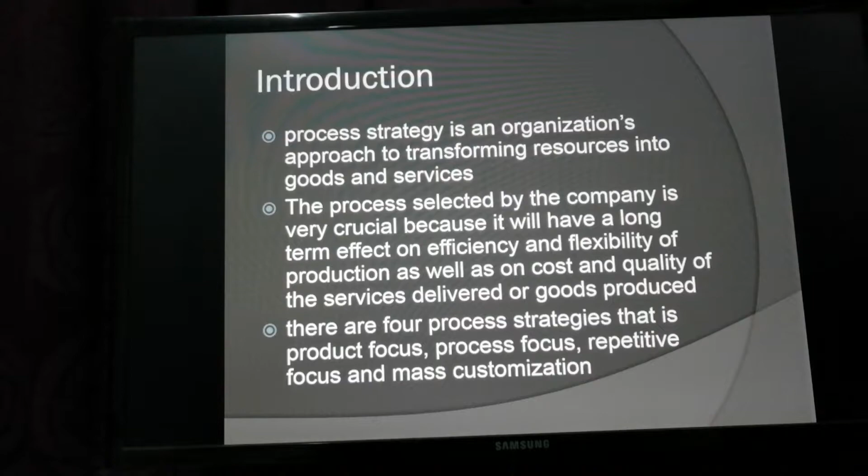Company background of Top Glove. Top Glove Corporation Berhad is the world's largest manufacturer of gloves, established in 1991 and headquartered in Malaysia. It has over 2,000 customers in 195 countries worldwide. Top Glove's main products are rubber gloves, synthetic gloves, and surgical gloves. Top Glove products are an essential item in the healthcare industry, ensuring human safety and helping to save lives.

Okay, why we choose Top Glove? Top Glove Malaysia, 19 November 2020, is selected for this case study because it met the criteria of product focus, which produce high volume and low variety, continuous flow process, long runs of product type such as size, grade, and color, require high fixed cost but low variable cost, reward high facility utilization.

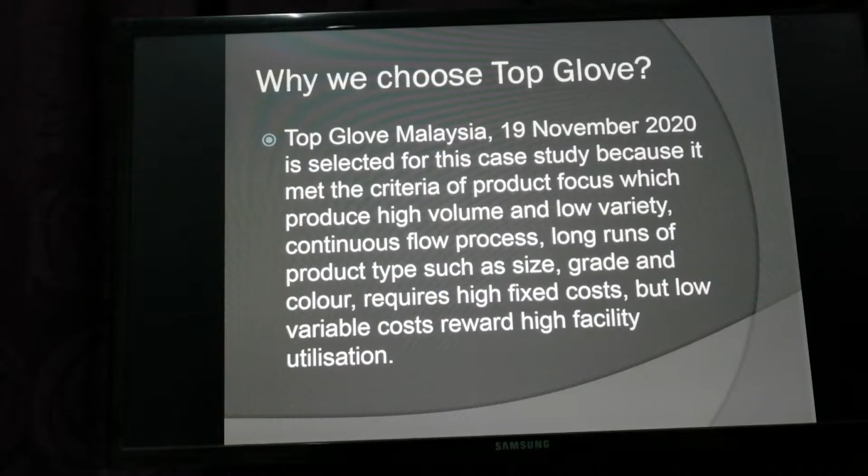Literature review of Top Glove. We study about Top Glove Malaysia from 21st September till 27 September 2020. Top Glove Corporation Berhad released its best ever quarterly results last week with a net profit of more than 1 billion, meeting consensus expectation. The stellar growth stemmed from the global surge in demand for gloves as a result of the COVID-19 pandemic. With the increasing awareness of personal hygiene, they are confident that demand will continue to increase.

With COVID-19, Top Glove estimate that glove demand will grow by 20% per annum in 2020, 25% in 2021, and 15% post-COVID-19. Due to their investment in automation and continuous R&D, they have improved productivity by 78% from 8.4 workers per million pieces of glove to only 1.8 workers per million currently. The group has earmarked RM8 billion for capex over the next 6 years from 2021 to 2026, which will provide them with an additional capacity of 100 billion pieces of glove.

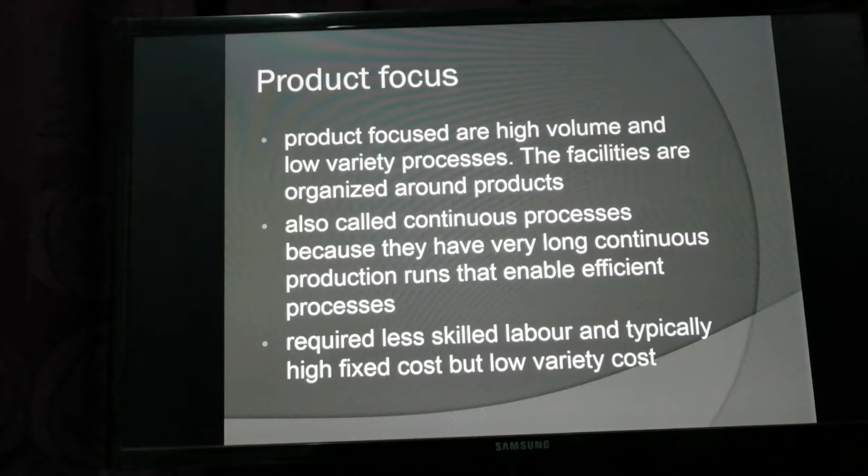Okay, we will look at the product focus process. Product focus are high volume and low variety processes. The facilities are organized around products. It is also called continuous processes because they have very long continuous production runs that enable efficient processes. It only requires less skilled labor and typically high fixed cost but low variable cost.

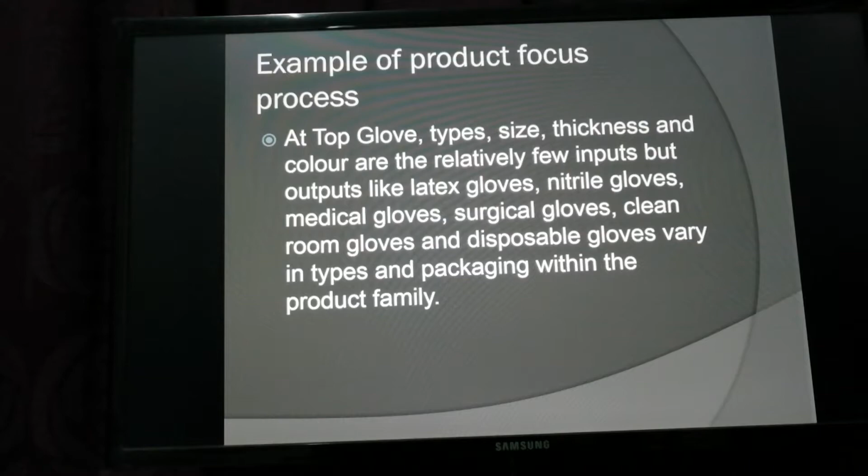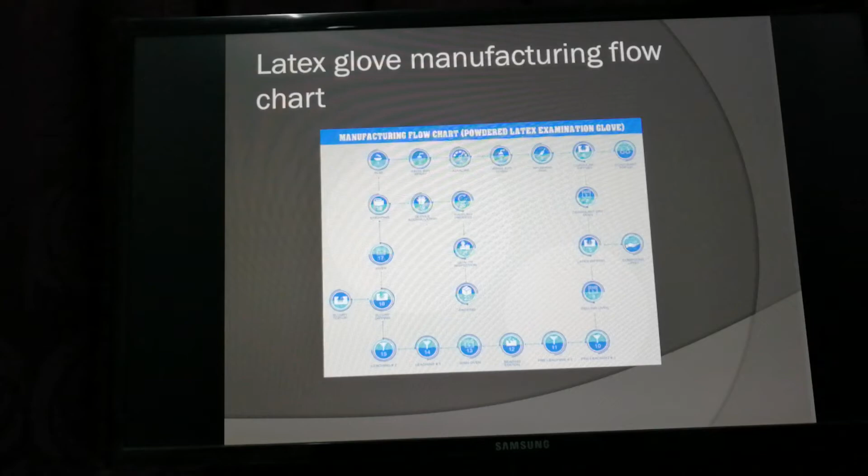Example of product focus process. At Top Glove, type, size, thickness, and color are the relatively few inputs, but outputs like latex glove, nitrile glove, medical glove, surgical glove, clean room glove, and disposable glove vary in types and packaging within the product family. Types of glove. And then we will go to the latex glove manufacturing flow chart. We will look in detail at the following content.

The first process is former cleaning. The glove former needs to be cleaned before it can be used to form hand-shaped latex glove, before the latex can be processed to the coagulant dipping process. Glove formers must be dipped into an acid bath and then rinsed with clean water. An alkaline bath is used by dipping the glove formers in it to neutralize the acid, and again rinsed in clean water. Okay, after that, glove formers are brushed to ensure the surface of the glove former is consistent and eliminate pinholes on the latex glove after it is formed.

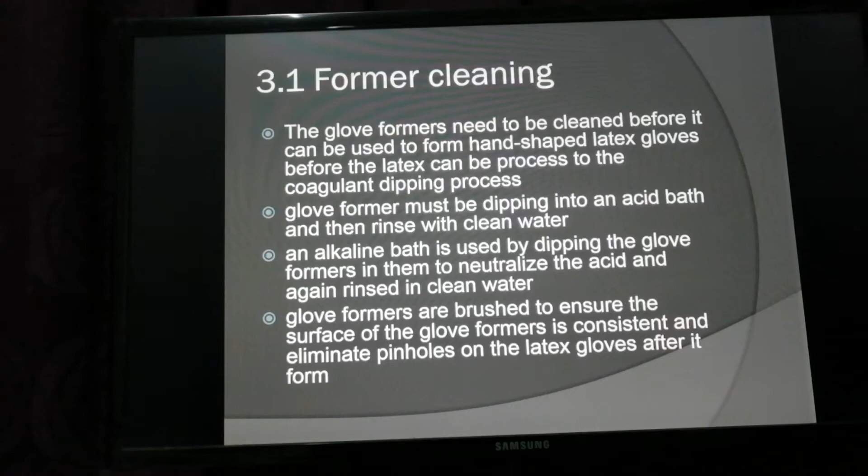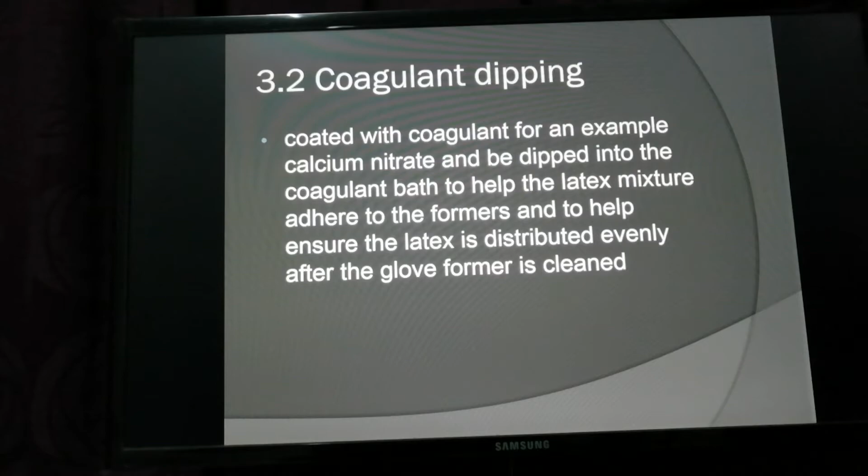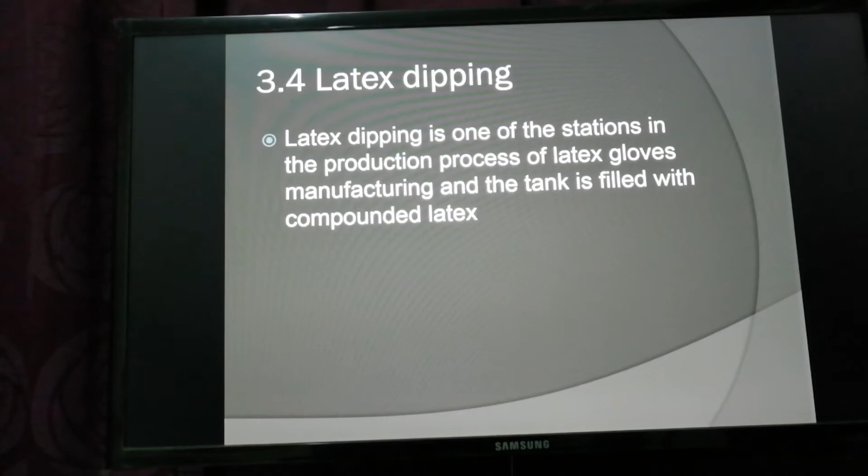Next process, coagulant dipping. Coated with coagulant, for example calcium nitrate, and dipped into the coagulant bath to help the latex mixture adhere to the formers and to help ensure the latex is distributed evenly after the glove former is cleaned. And then drying. It is a process of drying the glove from wet to ready-made gloves. After that, latex dipping. Latex dipping is one of the stations in the production process of latex glove manufacturing, and the tank is filled with compounded latex.

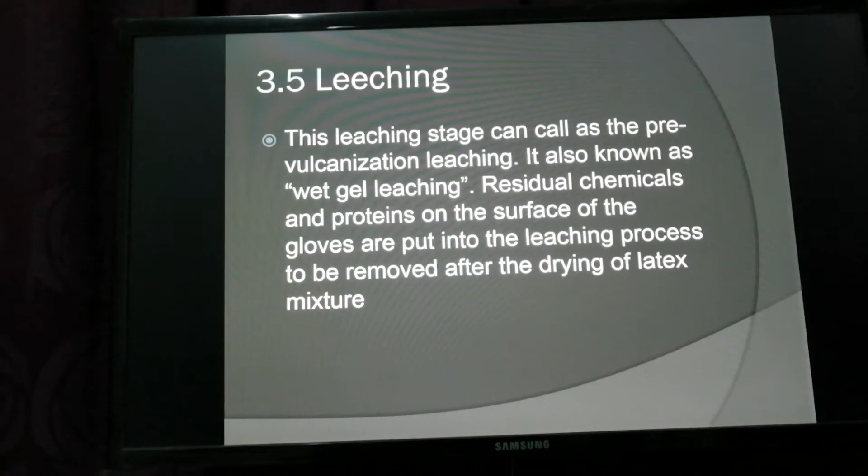Next process, leaching. This stage can be called the pre-vulcanization leaching. It is also known as wet gel leaching. Residual chemicals and proteins on the surface of the gloves are put into the leaching process to be removed after the drying of latex mixture. In the beading process, while still in the wet gel state, the cuffs of the newly formed gloves are rolled back by rotating beading brush to form beads. Beaded cuff also gives strength to the gloves as well as enhancing the ease of donning the gloves by user later.

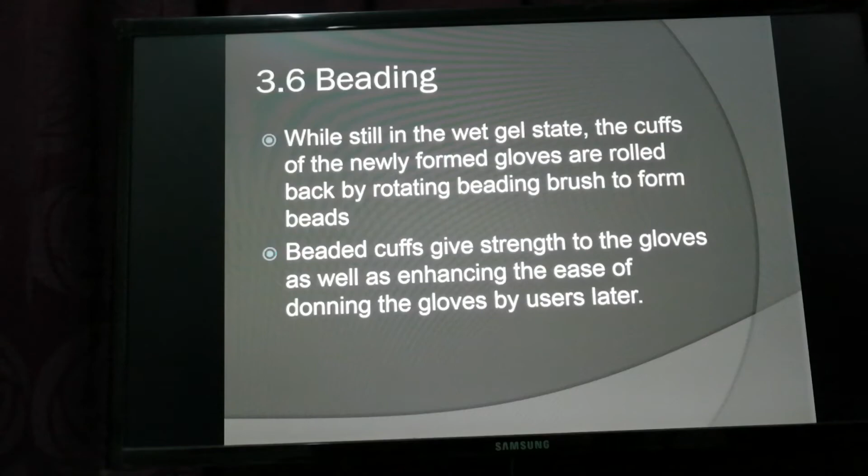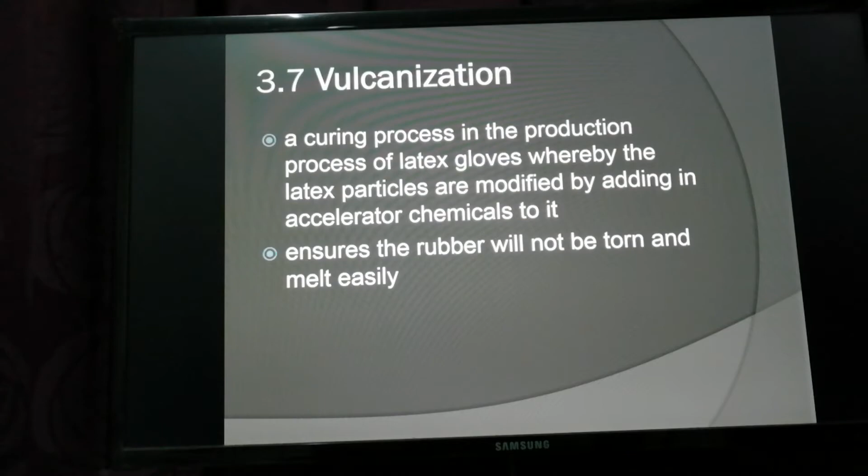And then vulcanization, a curing process in the production process of latex glove, whereby the latex particles are modified by adding in accelerator chemicals to it. It also ensures the rubber will not be torn and melt easily. And then post-leaching. This process is similar to the wet film leaching previously. Time and temperature is the most important element to ensure effectiveness in the process of water extractives reduction.

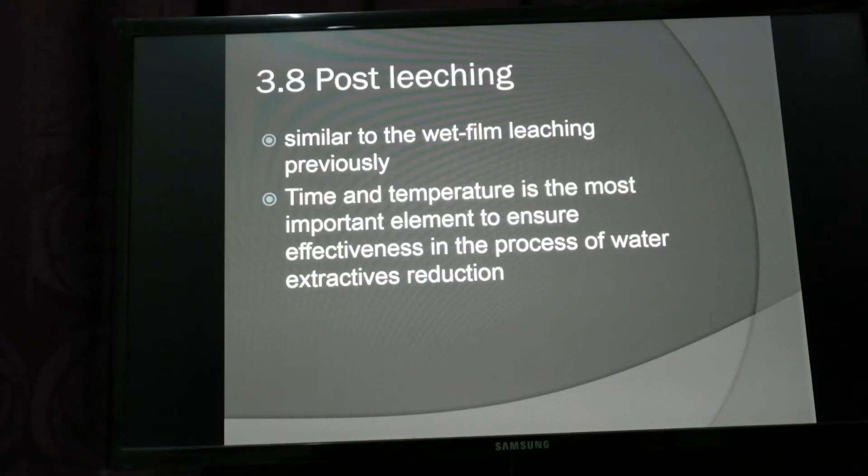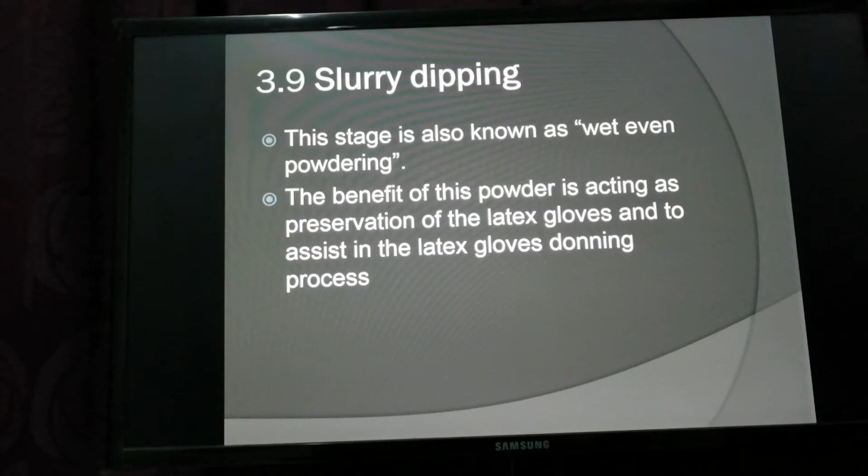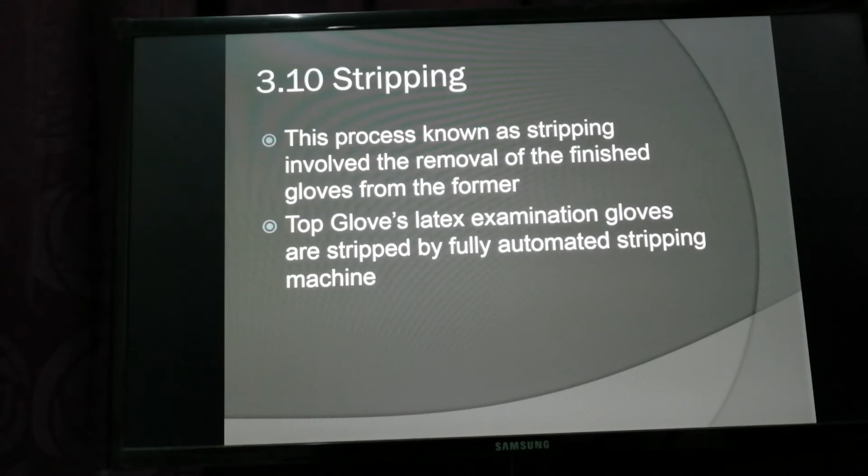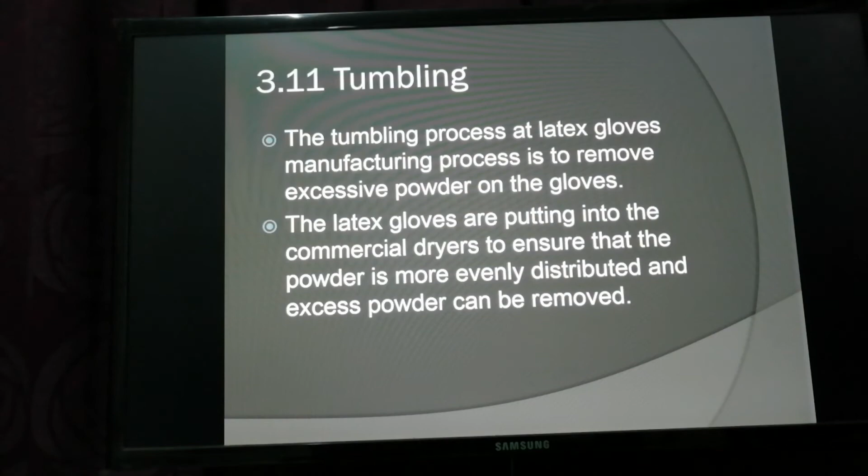And then slurry dipping. It is also known as wet powdering. The benefit of this powder is acting as preservation of the latex glove and to assist in the latex glove donning process. After that, stripping. This process involves the removal of the finished glove from the former. Top Glove latex examination gloves are stripped by fully automated stripping machine. After that, tumbling. This process in latex glove manufacturing is to remove excessive powder on the gloves. The latex gloves are put into commercial dryers to ensure that the powder is more evenly distributed and excess powder can be removed.

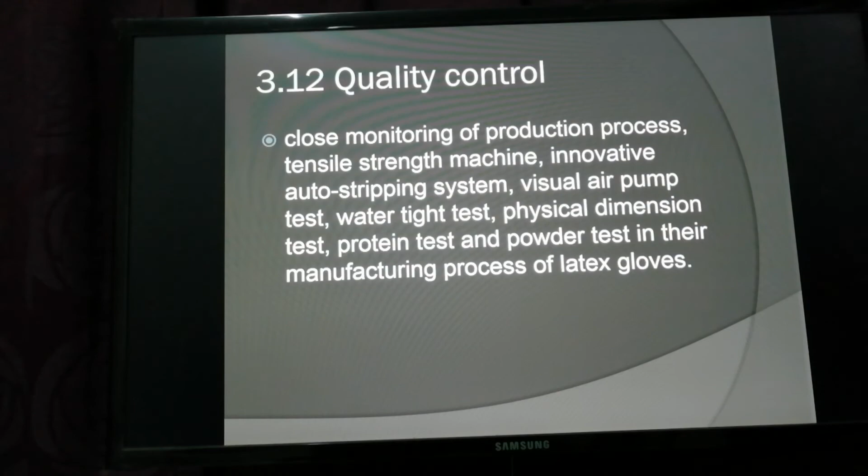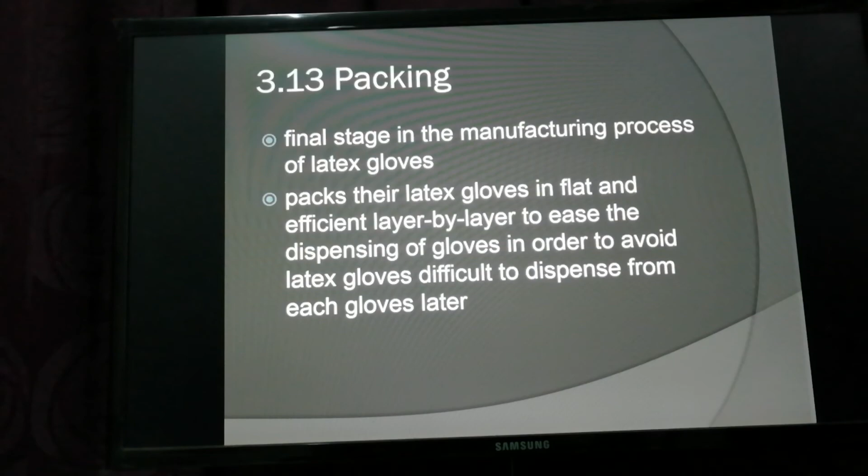After that, quality control: close monitoring of production process, tensile strength machine, innovative auto stripping system, air pump test, watertight test, physical dimension test, protein test, and powder test in their manufacturing process of latex glove. And this is the last process, the final stage in the manufacturing process of latex glove. They pack their latex gloves flat and efficiently, layer by layer, to ease the dispensing of gloves in order to avoid latex gloves being difficult to dispense later.

As a conclusion, a good and correct process selected by a company is very crucial because it will have a long-term effect on efficiency and flexibility of production as well as on cost and quality of the services delivered or goods produced. And the company can succeed and remain competitive with the right process strategy.